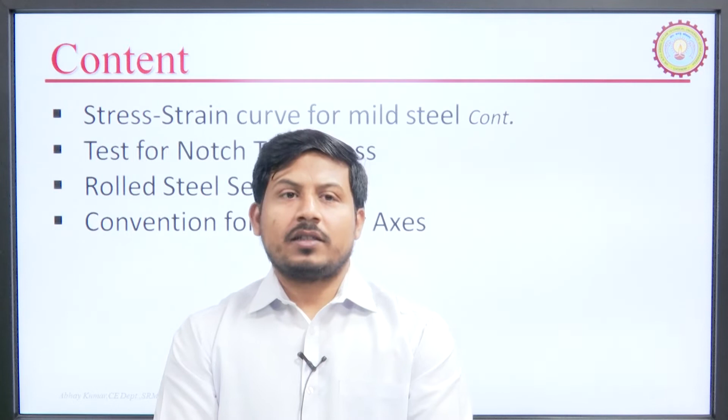Today we will discuss about rolled steel sections. In this lecture we will continue our past discussion based on the stress strain curve for mild steel. Then we will talk about the test for notch toughness. Later on we will talk about the various rolled steel sections used in steel structures, and in the last part of this lecture we will discuss the various conventions suggested by IS 800 2007 for member axes.

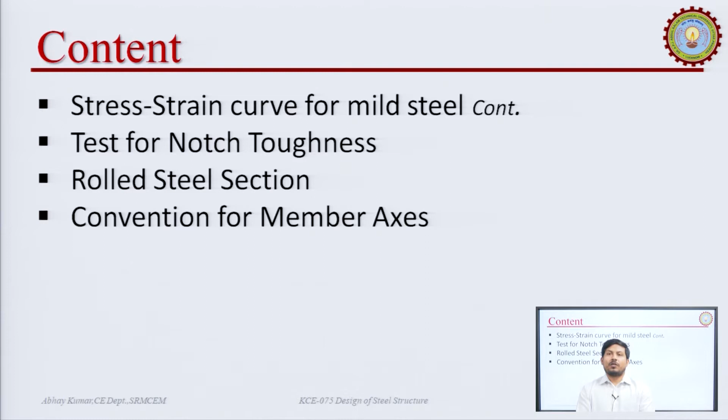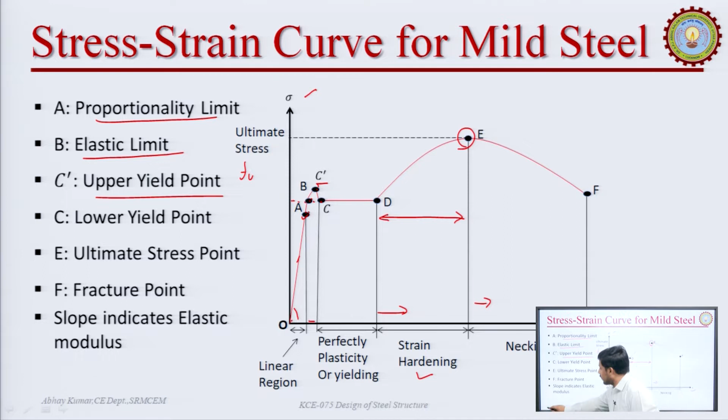If I draw the specimen used in the stress strain curve, that is the dumbbell shape I talked about in my previous lecture, we will see that there will be a neck formation in this region. Zooming on this, at this particular level the diameter or size of the member will reduce and there will be a neck formation. Therefore this region is known as the necking region. Our specimen will look like this.

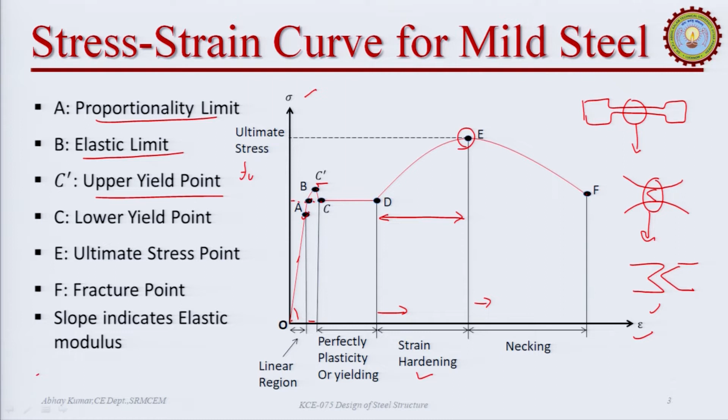Therefore this region is known as the necking zone. At point F, our material completely breaks and we see this kind of failure surface. Zooming this out, at the point of failure we find this kind of surface when the material breaks out. This is because of shear. Our material, steel, is a ductile material and it is weak in shear. Therefore finally the failure occurs because of shear. So this is how our complete stress strain figure comes out.

These are the major points about the stress strain curve for mild steel.

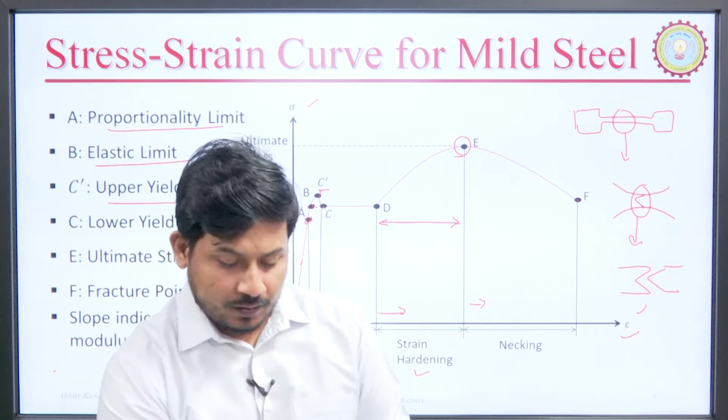Now, let us move to the next mechanical property of steel, that is toughness. There are various tests which can be performed to determine the toughness value of steel. Mostly there are two tests which are commonly preferred: first is the Charpy test, and second is the Izod test.

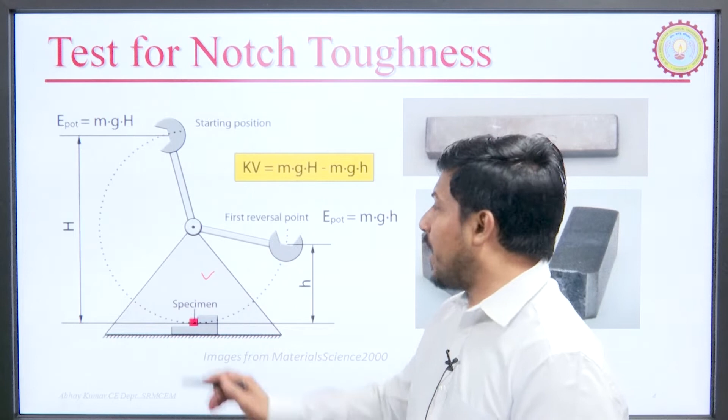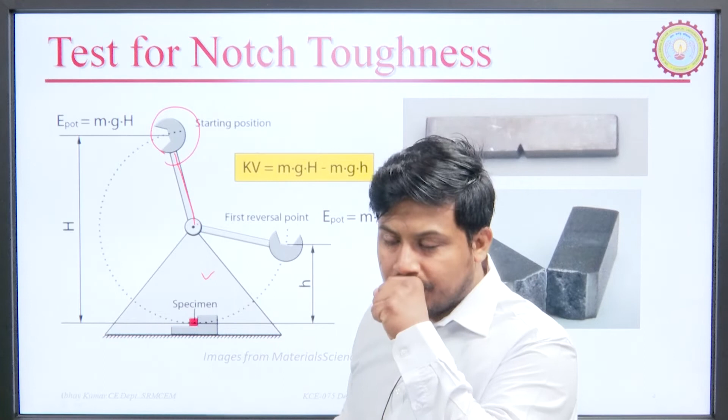In this figure, I have shown the Charpy V-notch test. This is an impact testing machine in which we can see there is a hammer attached to a movable arm. This movable arm is hinged at this very point.

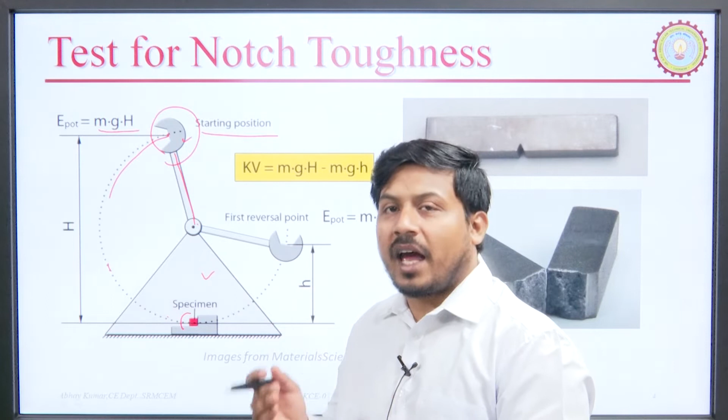So how do we perform this test, how do we calculate the toughness value or the energy stored in the material before failure? We release this arm from its starting position and it free falls following this trajectory. While following this trajectory, the hammer converts its potential energy into kinetic energy. At this point, the hammer strikes the specimen and transfers its kinetic energy to the material, and this transfer of force will be in the nature of an impact.

There will be an impact on this very point. In this figure I have shown how our specimen looks before the failure, and after the impact we see this kind of failure. So the amount of energy that this specimen absorbs before failure can be measured from here.

This is the amount of potential energy our hammer had. At this point, the potential energy the hammer transfers to the specimen, and the specimen breaks at its toughness value. The left out energy will cause the hammer to go up to a certain height. So the difference between the potential energy at these two points will give us the absorbed energy by the material, and this will be the toughness value of our specimen.

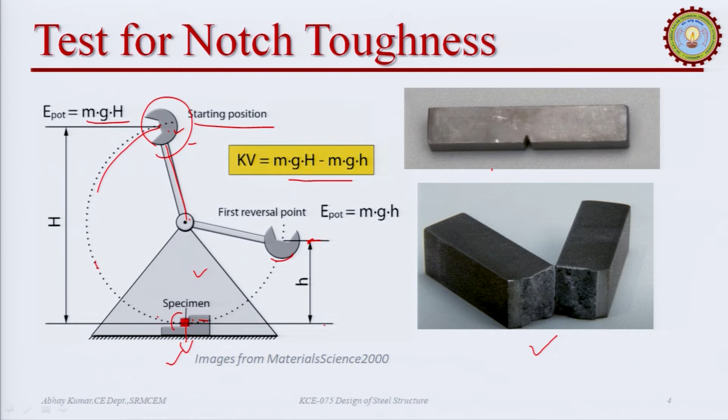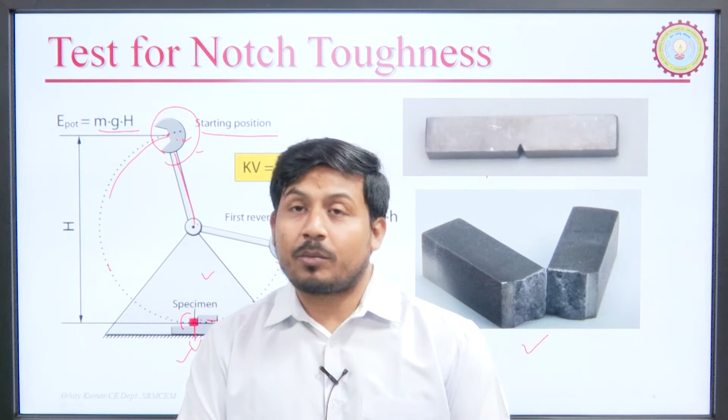This is just an introductory part. It can be discussed in much more detail, but I just wanted to give you an introduction about the toughness test we perform to determine toughness. Since the V-notch toughness is mentioned in our mechanical properties in the IS code, therefore I discussed this. Now, let us move forward.

Now let us talk about the various rolled steel sections available in the market and how these are designated, how we should mention them, and what are the different series in which they are available.

Let us talk about the very common rolled steel section available in the market: the I section. One may ask why these sections are called rolled steel sections. The name comes from their manufacturing process. We know that these sections pass through rolling mills, therefore this term came into existence: the rolled steel section.

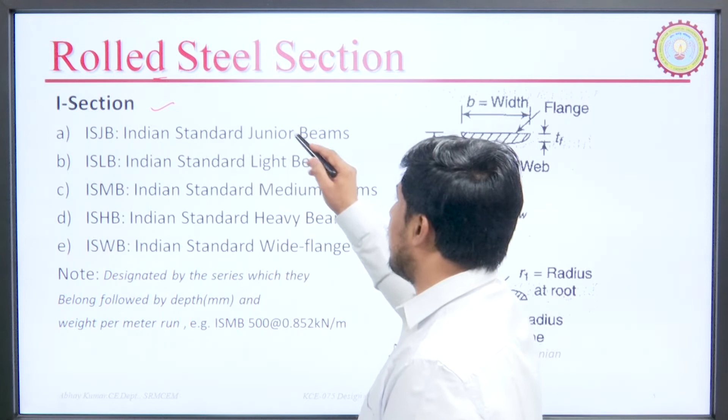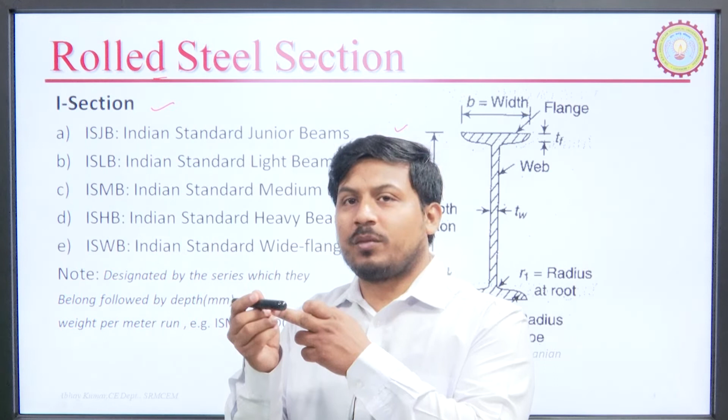These sections are basically classified on the basis of the shape of their cross section. For example, this is a pen, and if we cut this pen from here, we will see a circular cross section. So this steel section will look like this. I am trying to draw this in 3D, showing how it looks in cross section.

Since this section looks like the English letter I, it is termed as an I section, and it is available in various series like ISJB, which stands for Indian Standard Junior Beam. Similarly, ISLB light beams, ISMB medium beams, ISHB heavy beams, ISWB wide flange beams.

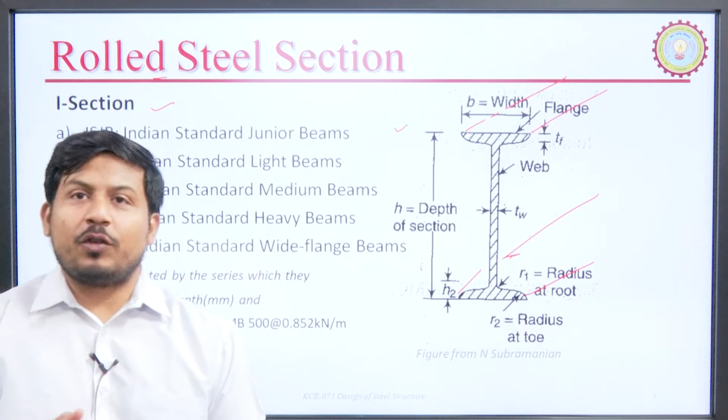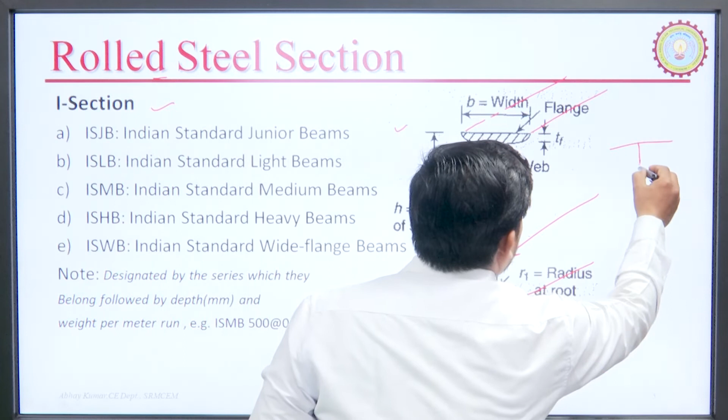What are LB, MB, HB? These are indicators of weight. Light beam means it will be of lighter weight, medium beam means its weight would be in the medium range, heavy would have a higher weight. And a wide flange beam would look like this, because its flange is much wider in comparison to the length of the web.

So these are the different series available, and how are these designated? They are designated by the series to which they belong and the depth. What is the depth?

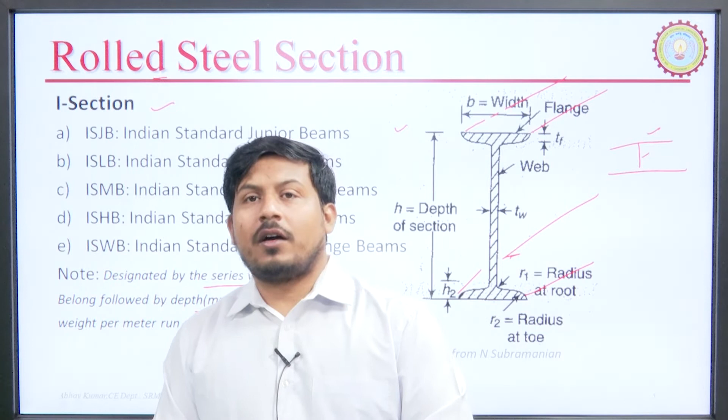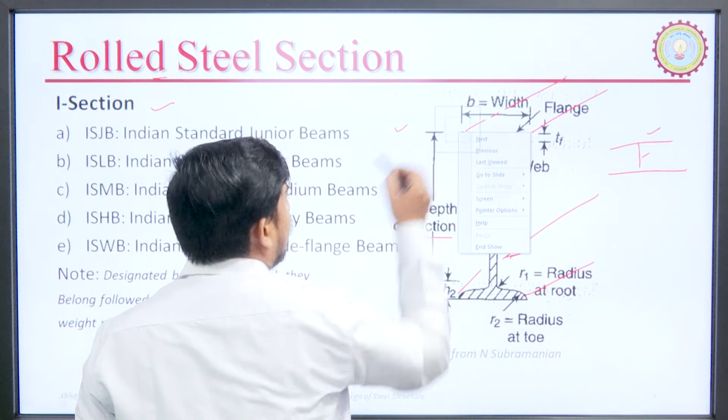It is really important to designate any section. It is a very important property of the section that is shown here. The depth is from the upper point of the flange to the lowermost point of this flange, known as the depth of the section.

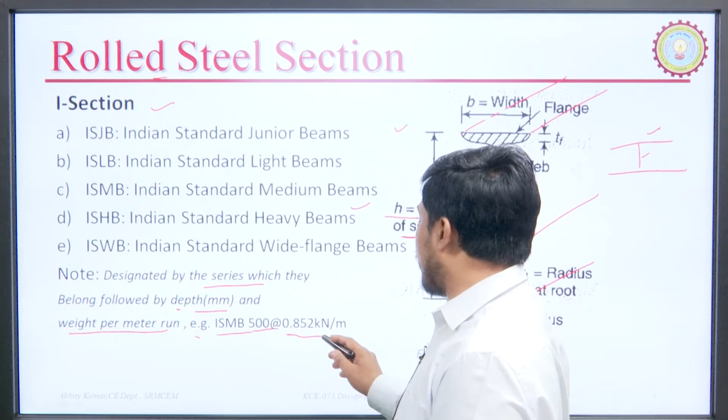So how is it designated? Series followed by the depth in mm and weight per meter run, that is weight per unit length. For example, ISMB means Indian Standard Medium Beam. 500 would be the depth of the section, meaning it is 500 mm deep, at the rate of 0.852 kilonewton per meter, meaning its weight is 0.852 kilonewton per meter of its length.

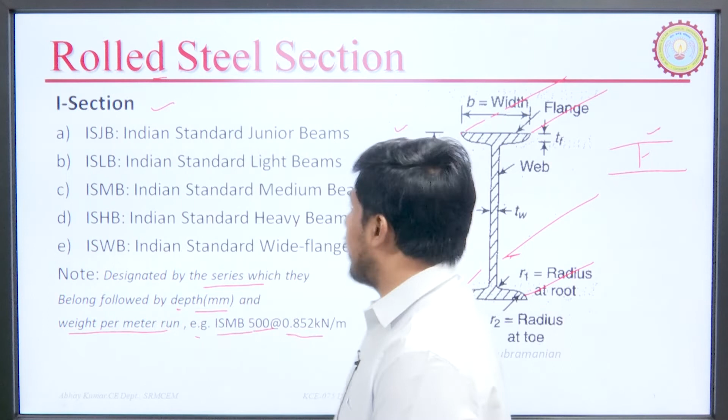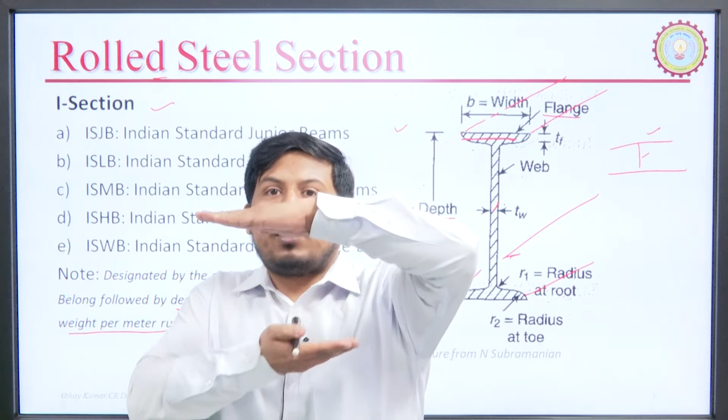One more thing I would like to highlight: this portion of the I-section is known as the flange section, and this section is known as the web section. The top section is the flange, the vertical section of the I-section is termed the web, and there is also a below point which is the lower flange. So from now on you must not confuse what is flange, what is web, and what is the depth of the section.

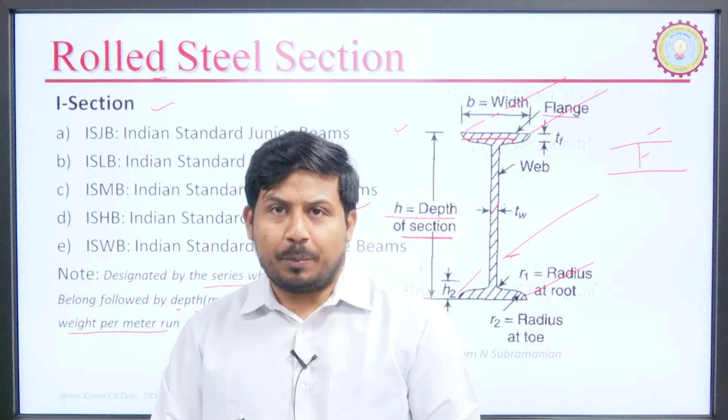Now let us move forward to another type of section, the channel section. It also comes in various series: ISJC Indian Standard Junior Channel, Indian Standard Light Channel, ISMC Medium Weight Channel, ISWB Indian Standard Special Channel.

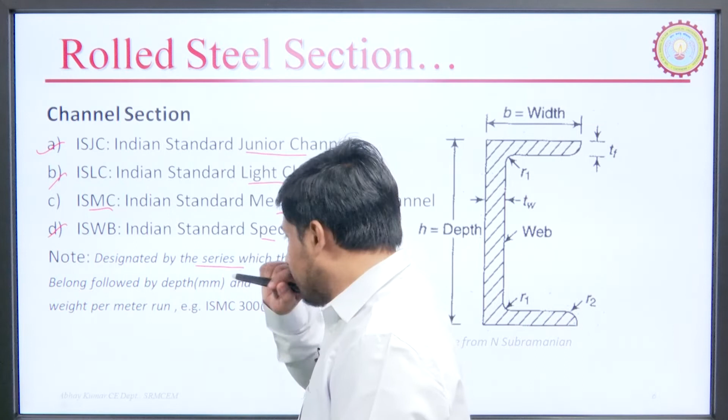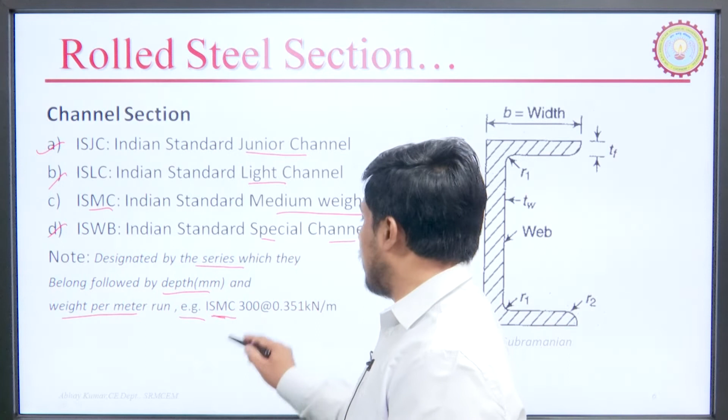These are also designated using the same set of rules: the series to which they belong, depth of the channel section, and weight per meter run. For example, ISMC 300 would be the depth of the section, indicated at the rate of 0.351 kilonewton per meter, which is the weight of the section.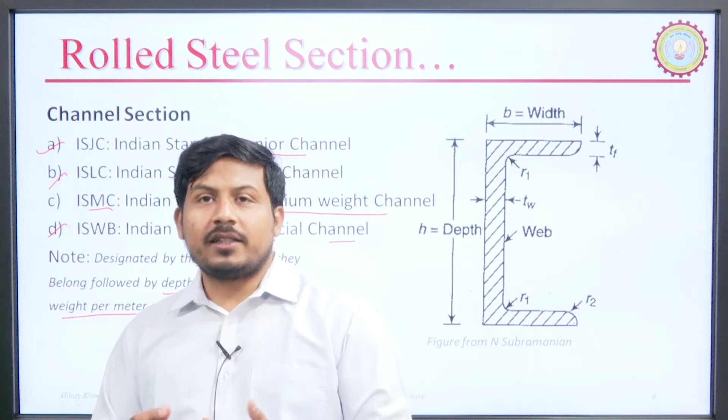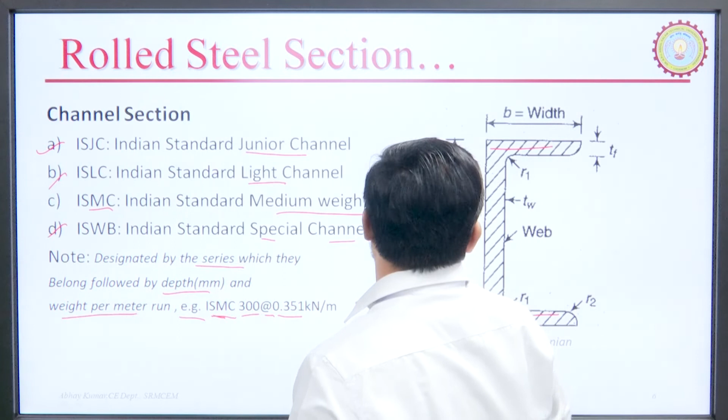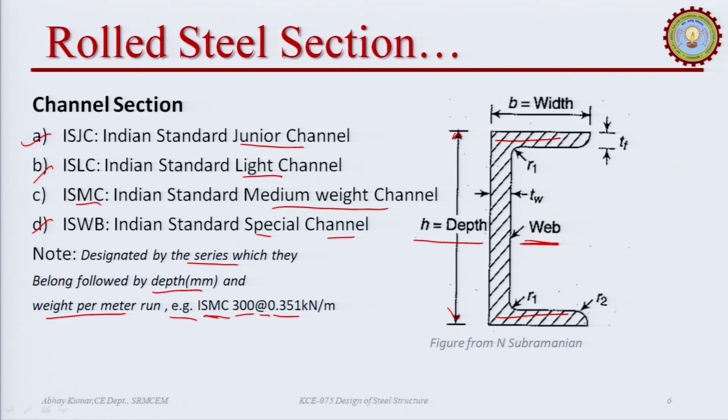Now in this we also have a flange and a second flange on the bottom, and this would be the depth of the section, and this would be the web part of the channel section. One may see that the channel section comes from the I section, or is a part of an I section. We will see this kind of section forming or combination of sections in a later part of this design of steel structures series.

Now let us talk about another very important and common section, the angle section. This section comes mainly in two series: the equal angle series and the unequal angle series. Equal indicates that the leg lengths of the angle section are equal. Unequal indicates that the lengths of the legs of the angle section are not equal.

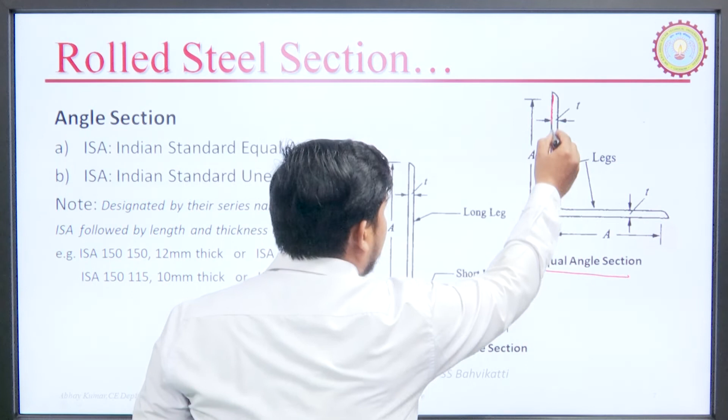Let me show this to you by this figure. For example, this is an equal angle section, meaning the length of its legs would be the same. Here is the unequal angle section, meaning one leg will be a bit longer or shorter than the other leg. So this is the unequal angle section.

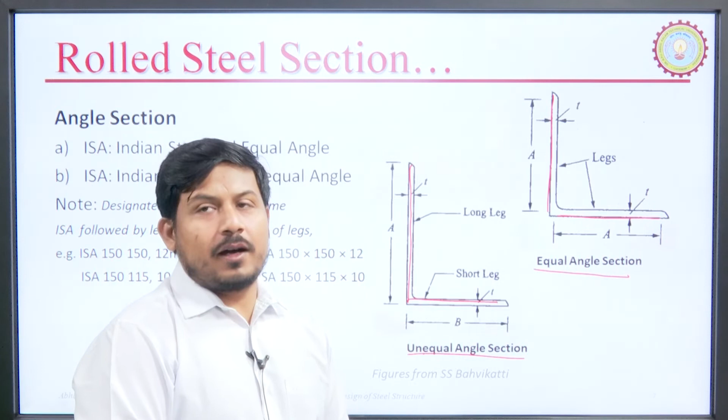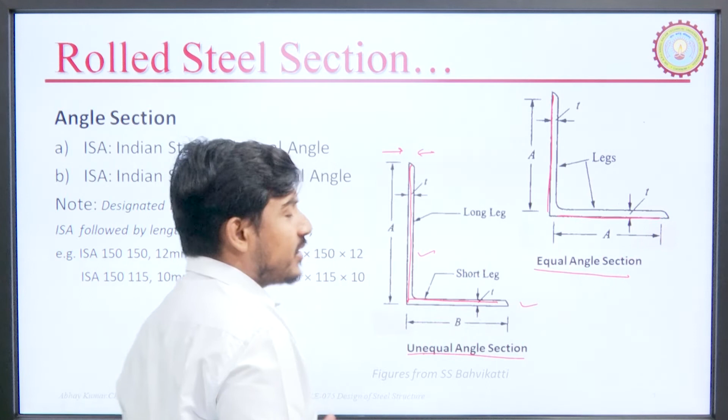So in the designation of the angle section, we must mention the length of the legs through which the angle section is formed. There is also one more thing used for the designation, the thickness of the legs. In most angle sections, generally the thickness of both legs is constant. So how is it designated? It is designated like ISA, meaning Indian Standard Angle.

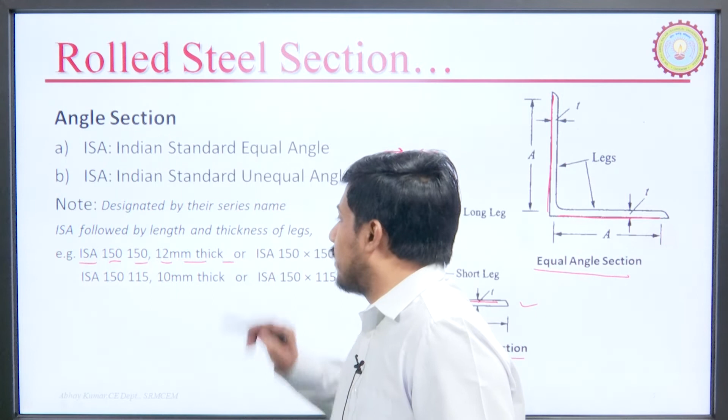150, 12 mm thick, or in the same sense we can say 150 cross 150 cross 12. What does this indicate? It indicates that one leg of this angle section has a length of 150 mm, the second is also 150 mm, and the thickness of the angle section is 12 mm.

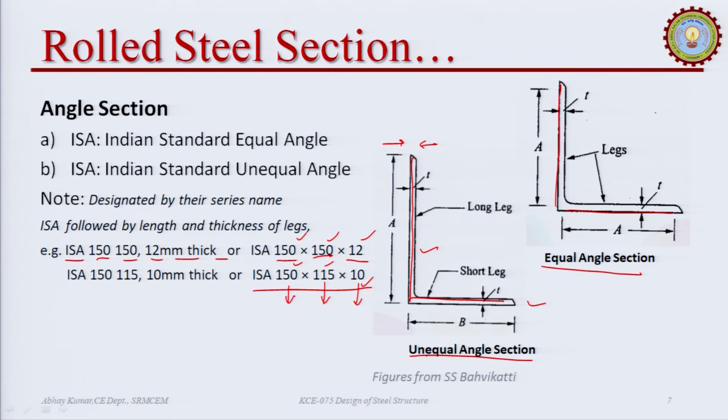For an unequal angle, it would be like 150 cross 115 and 10. This indicates that one leg is 150 mm length, the second is 115 mm, and the thickness is 10 mm. These are really very common sections which we can commonly see in various steel structures around us.

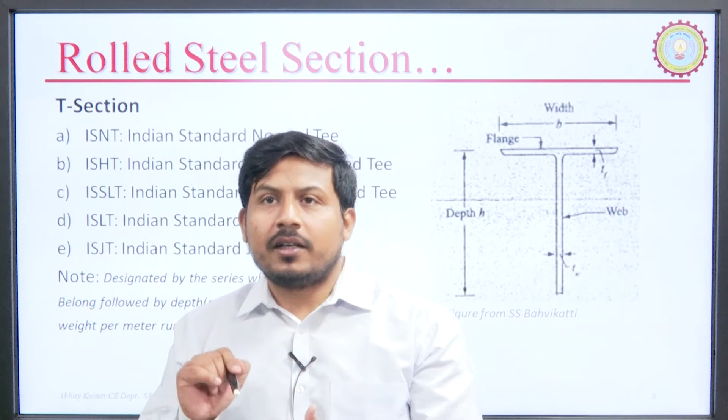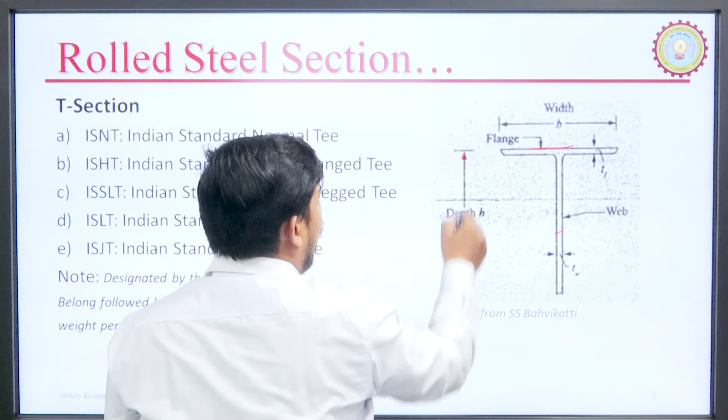Now let us look at another section, the T section. The T section has one flange only and a web, but there is no second flange at the bottom of the T section. It looks like the English letter T. In this figure I have shown a typical T section: here is the flange, here is the web. And in this, the depth of the section is also really very important, indicated by H.

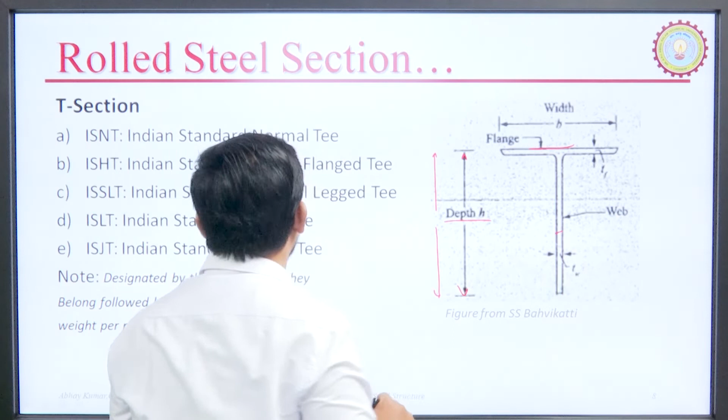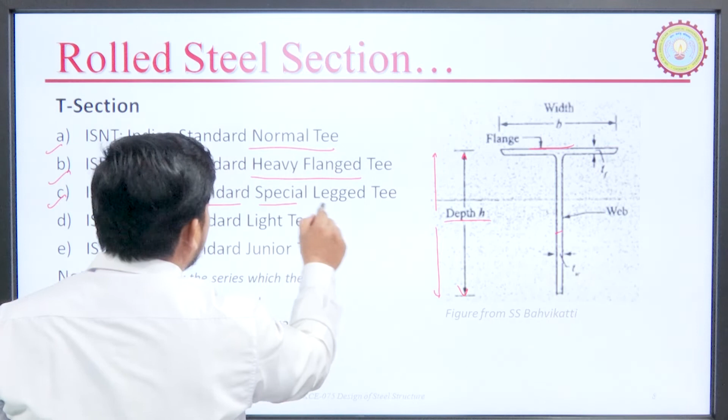This T section also comes in different series like ISNT. ISNT stands for normal T, ISHT stands for heavy flange T, ISSLT stands for standard special legged T, and similarly ISLT, ISJT. You guys can read it from here.

How is it designated? It is designated by the same set of rules that we used in the I section and the channel section. For example, the section we are designating here is from the normal T series. ISNT 60, what does it mean?

It is the depth of the section. The T section we are talking about is 60 deep, at the rate of 53 Newton per meter. What does that mean? Its weight is 53 Newton per meter of its length.

One more thing, the terms TF and TW indicate the thickness of the flange section and thickness of the web section. We will use these thicknesses in later parts of the series.

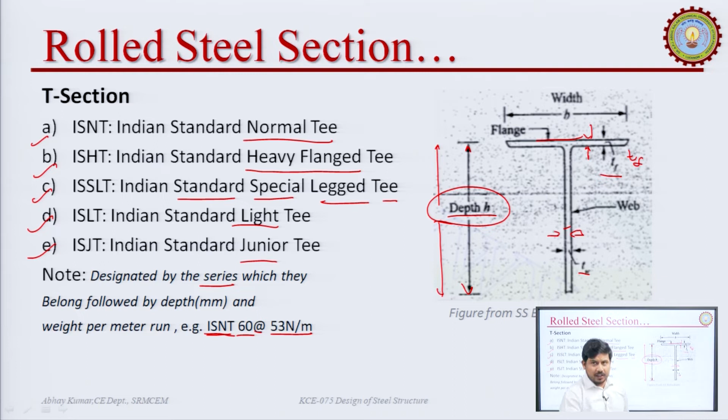Now let us move forward to other types of rolled steel sections available in the market. These are commonly used, and we would look at other common available sections.

This is a bulb angle section. It means it has a bulb shaped structure at the end of one of its legs. It is mostly used in the ship building industry.

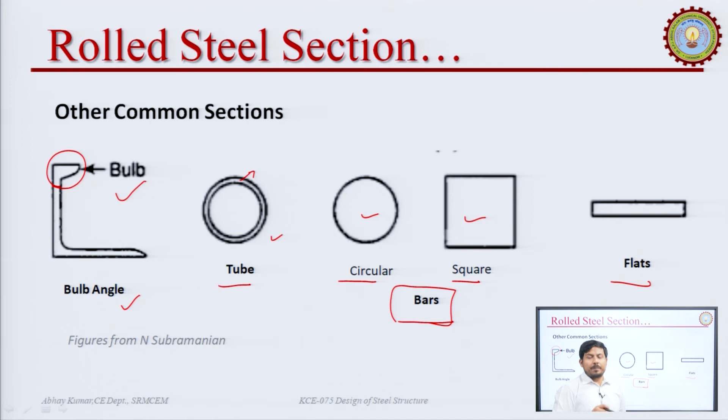We have various kinds of bar sections available. There is a tube section, meaning it has a hollow tube, a thin shell kind of structure, in circular or square section. Various bars come in the market with these kinds of sections. Also, there are various flats, sheets, and strips of steel sections available in the market.

Now let us talk about the built-up section. What is a built-up section? As its name indicates, this section is built up, meaning it is a combination of two different sections already available in the market.

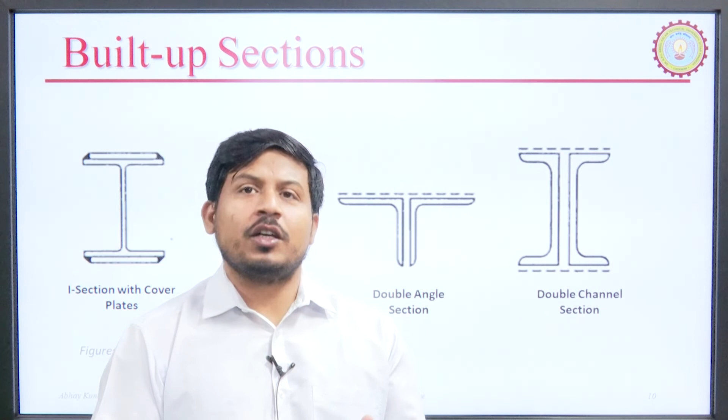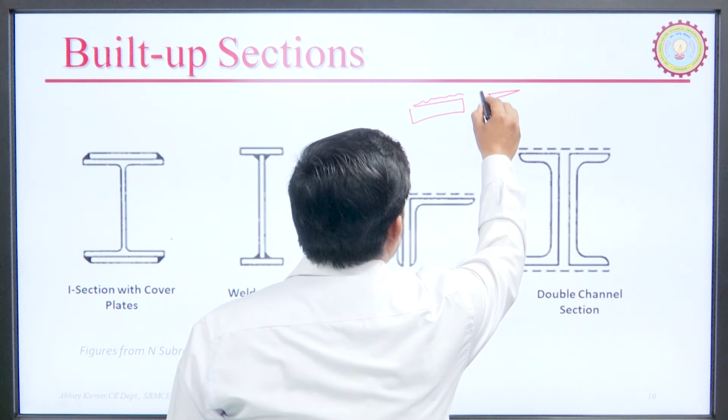Why do we need to make a built-up section? We need it to increase the capacity of the member. For example, there is a beam subjected to very heavy load, therefore the stresses will be very high at certain points.

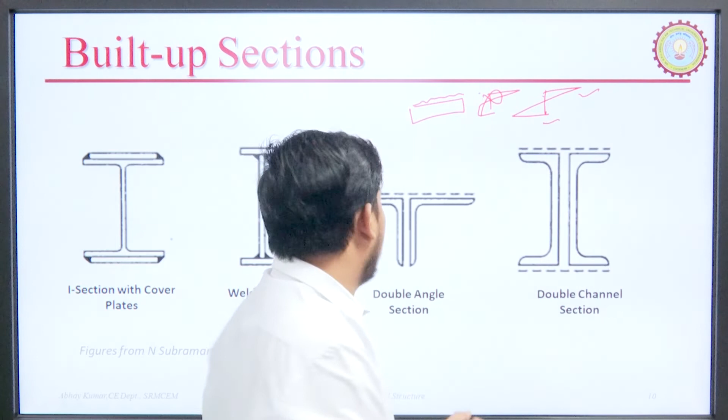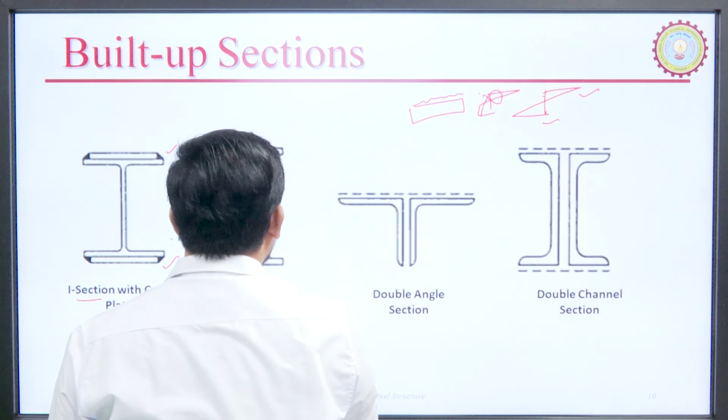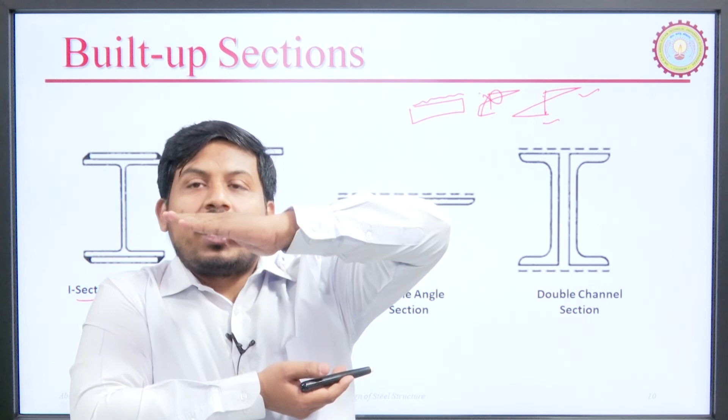So to increase the resistance level at these points, we must increase the load carrying capacity. We do this by providing cover plates on the I section. Similarly, for a welded plate girder, since the available depth of the I section in the market is limited, if we are constructing a beam requiring very high depth, we construct our specially required beam by connecting two different plate sections like this.

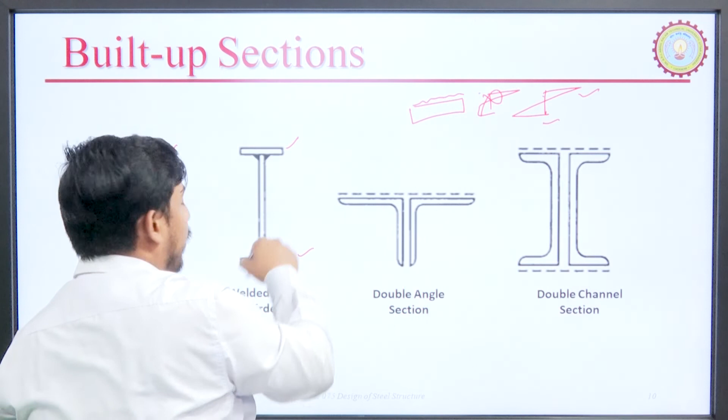Similarly, double angle sections and double channel sections can be joined together in this manner to support heavy loading.

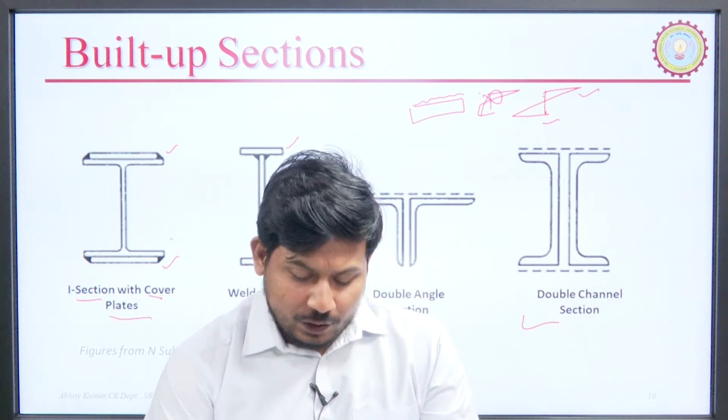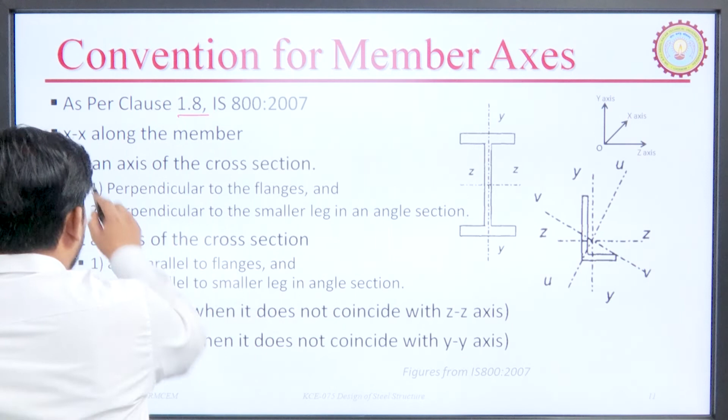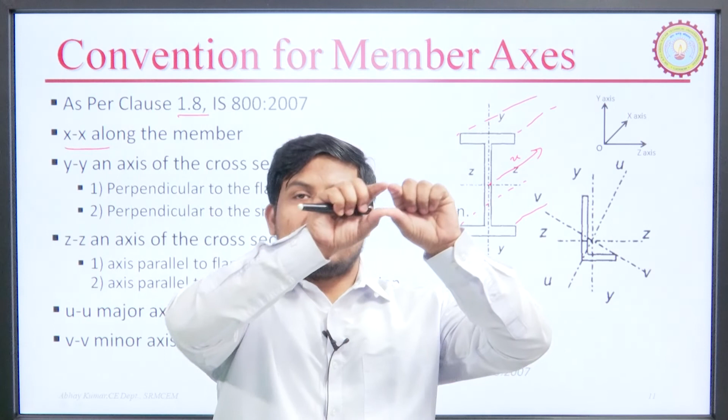Now let us talk about the conventions for member axes suggested by the IS code. As per clause number 1.8, the x axis should be the axis which is along the length of the section. For example, there is a beam with a flange, the web, and again a flange. So the x axis will be along the length of the section.

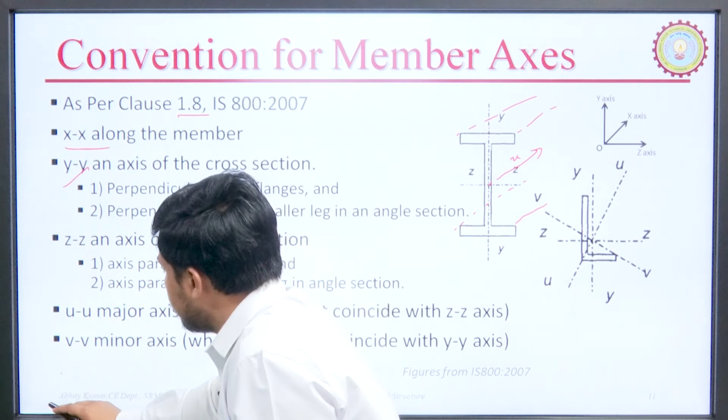The y axis is perpendicular to the flanges, as shown here. Similarly, the z axis is parallel to the flanges. That axis which is parallel to the flanges is termed the z axis, and that axis which is perpendicular to the flanges is termed the y axis.

Now let us talk about these axes in the angle section. In the angle section, the axis perpendicular to the smaller leg will be the y axis, and the axis parallel to the smaller leg will be the z axis.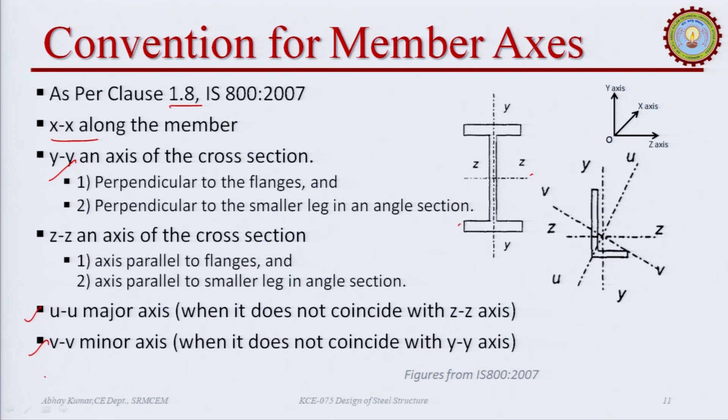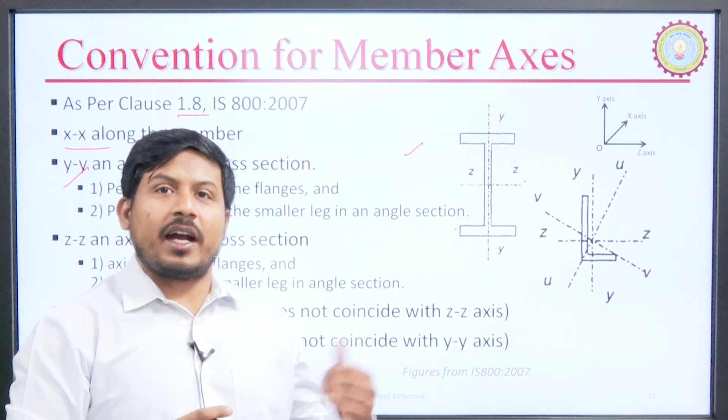There are two other axes also mentioned, the UU and VV sections. UU and VV are the major axis and the minor axis respectively, and these have different values in the angle section. In the I section or channel section, the x axis and y axis, and y axis and z axis, represent the major and minor axes, but in the angle section we require another designation, therefore it is mentioned like this.

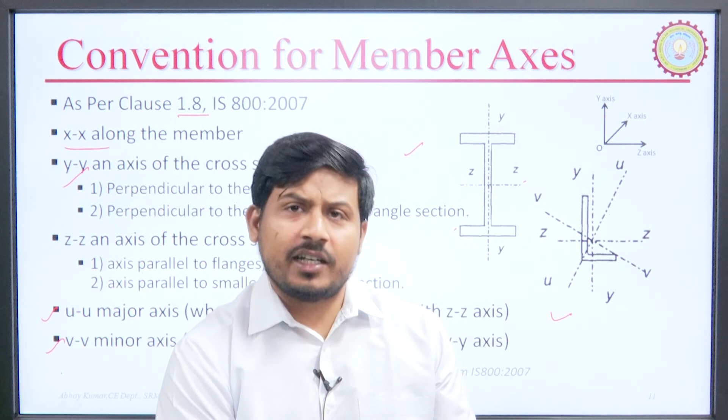We will continually discuss all these in later parts of the course. Thank you for that today.